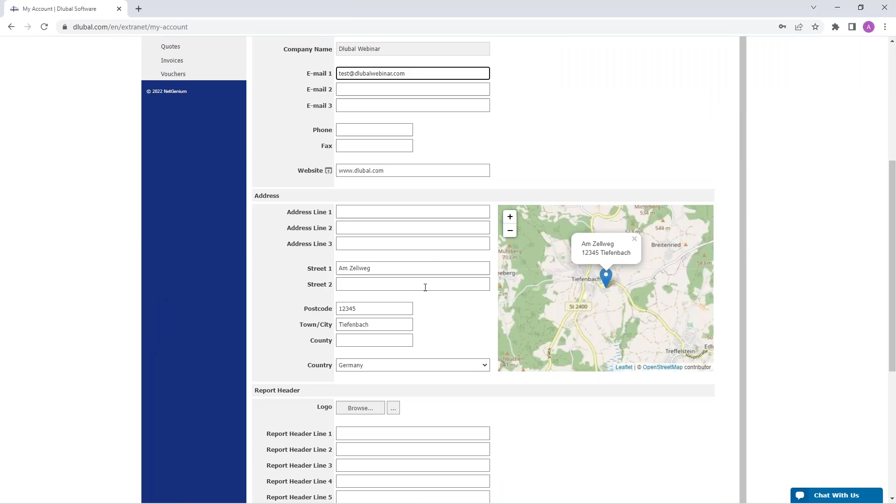Okay, then my activities. If you send questions to the Dlubal support with a certain subject, you can see who's the solver, if it is completed, and so on. Then the next table is the company, the data of your company, then the users of the company. And if you have got admin rights, you can add a new user and you can give the new user also admin rights. And then he can also create new users.

Okay, then you can see the service contracts of your company, all activities of the company, the questions, for example, to our support, and the status, then quotes, invoices, and vouchers. To the vouchers: before you purchase any product of us, take a look at the vouchers. Maybe there are vouchers from a campaign, or all our customers that send us customer projects get a voucher of 100 euro, and the voucher is available for 3 years. And if you want to buy any product, just take a look at the vouchers.

Then here you can see all licenses of your company. That test account has got 3 licenses. If you scroll down a little bit, you can see the first license has got all licenses of RFEM, all add-ons, and RSTAB 9. And for example, the third account has only licenses for RSTAB 9 with all add-ons. Okay, that's a good overview. Then another table with the licenses. Okay, and here you can see, for example, if licenses are borrowed for a certain time. Okay, that should be all I would like to explain for the licenses.

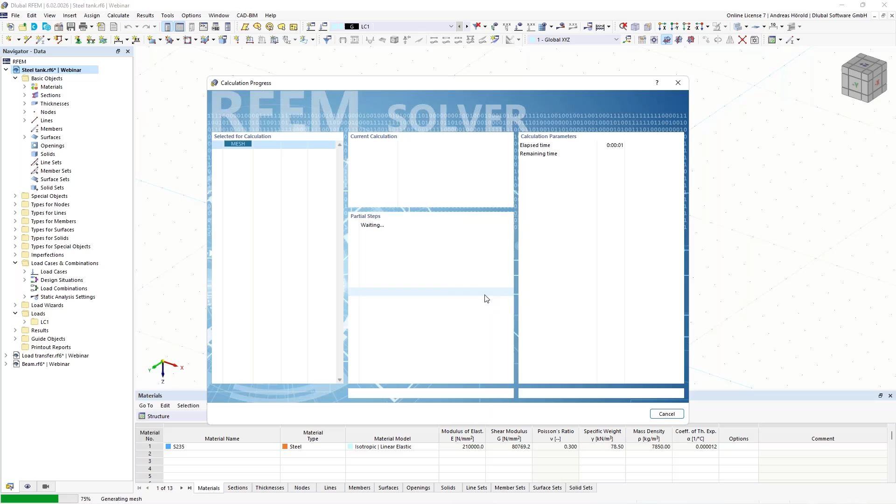I wanted to introduce the Dlubal extranet, and we turn to the next question and to the program. The next question is, why can't I mesh my model with curved surfaces? Okay, let's try it. We want to create a mesh, and we get this error message. It's currently not possible to mesh a quadrangle area on the 360-degree circle. We are working on a solution, and in the meantime, you need to use a workaround.

The surface must be divided into several quadrangle surfaces. I will show you how to do that. I delete the two surfaces. Then I copy these two lines during a rotation; I use the function rotate selected objects. I check create copy, one copy, 180 degrees. The axis should be set, that axis, and the rotation point should be the middle of the circle.

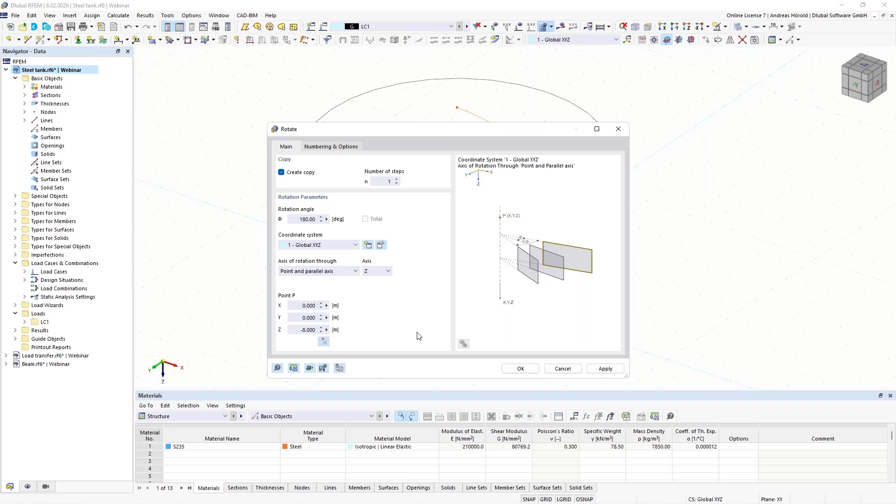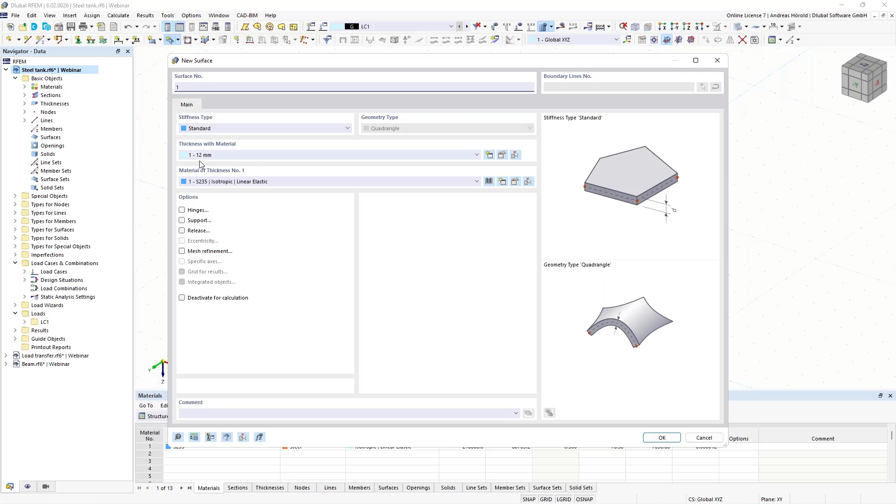Okay, then I use the function here right above, connect selected lines, and with that window I divide the circle into two lines, also the lower circle. Okay, now I can create the new surfaces. That should be quadrangle surfaces, with the same thickness as before, 12 millimeter. Okay, and I select the boundary lines. And I create 4 surfaces now.

Okay. Okay, and now we can create the mesh. Okay, that works. Now it's only a workaround during the correcting of that bug. Okay, then we turn to the next questions.

How can free nodes be deleted? From time to time during modeling or after an import, it can happen that free nodes are created, for example, when you import your model from a CAD program. These nodes can easily be found. At first, I create some free nodes. And I can find them with Edit, Select, and Free Nodes. There's also a shortcut, Control, Shift, and F key.

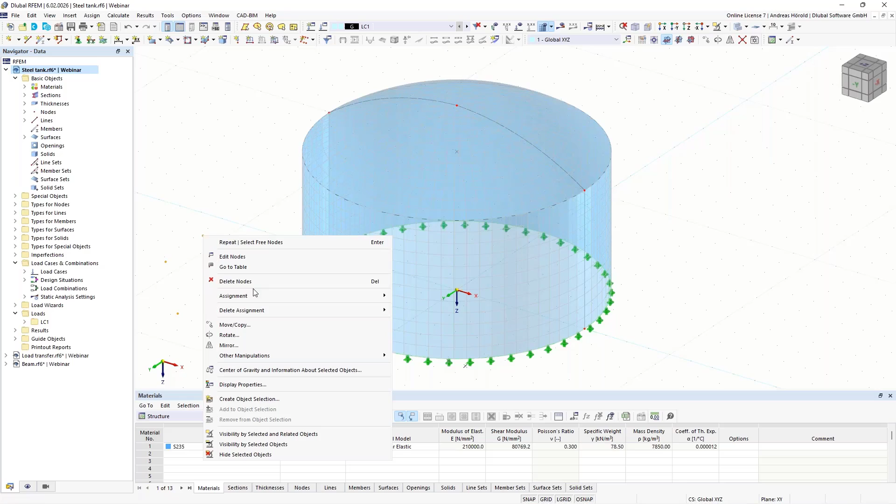I select them with the function. You can see now they are yellow. And you can delete them by pressing the delete key or with a right mouse click on one node, and you can choose delete nodes. Okay, that's the solution for that question. So then we turn to another model and another question.

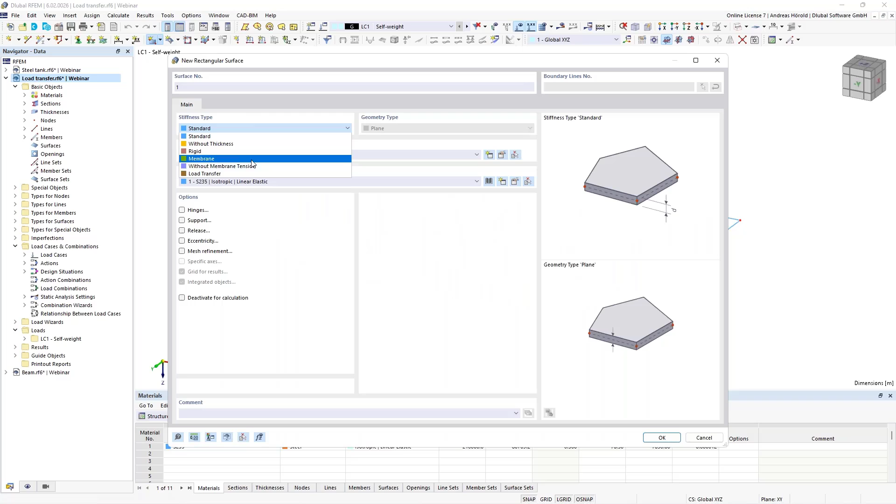The question is, how can an areal load transfer be generated by a distributed load on members? There are 2 possibilities. The first possibility is to use a surface of type load transfer, or the load wizard. I will show the two possibilities. So I start with a surface. Stiffness type is load transfer. That surface has no stiffness.

Okay, I select the nodes here on the edges. Okay. So now we have got four surfaces, and we create a surface load.

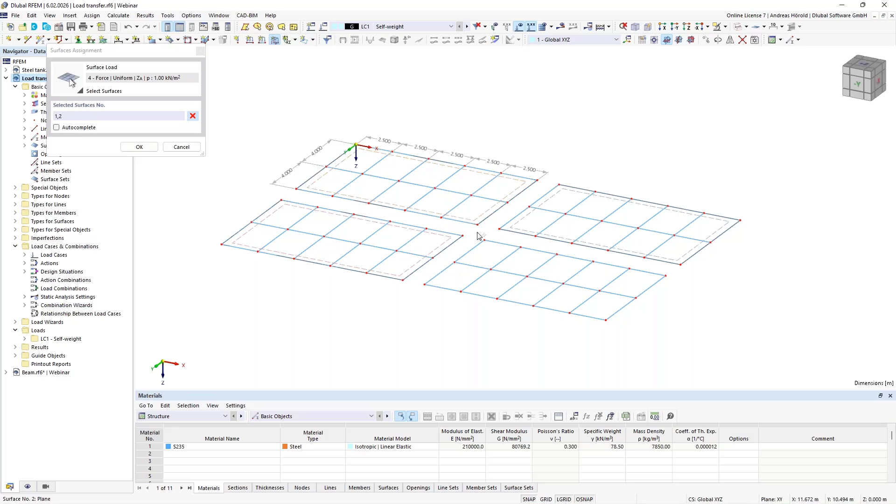I choose 1 kilonewton per square meter. 3 times. Okay. So I can divide this load, or divide the display, for example by clicking on the surface and selecting display load transfer separately. Only the display is then separated.

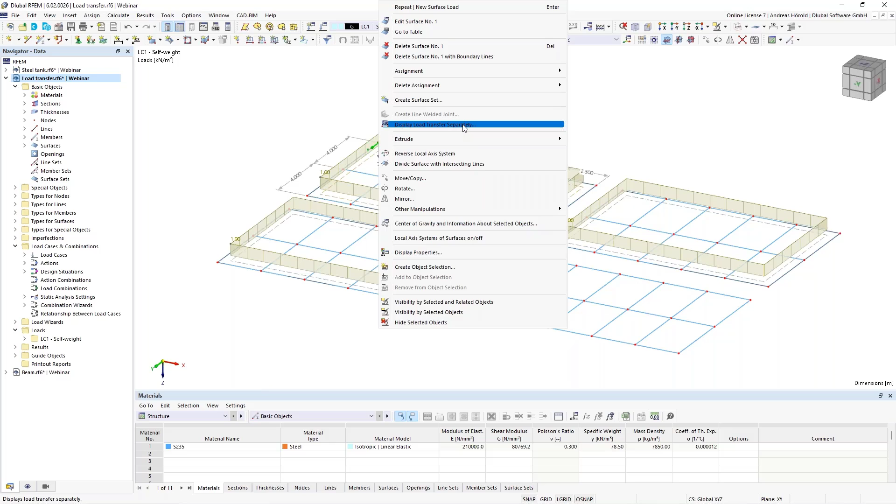So this is the first solution, and I can undo that and use the other solution. In the navigator display under surfaces, you can check display load transfer separately here. Okay. So let's change the load distribution.

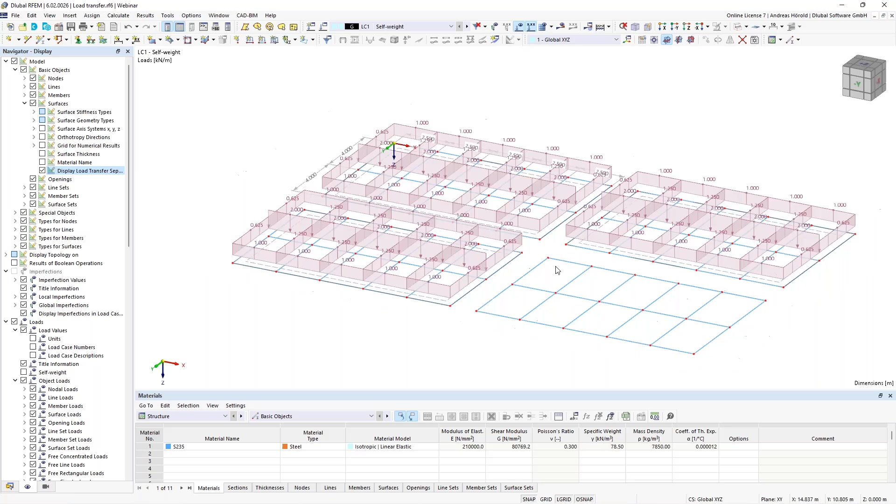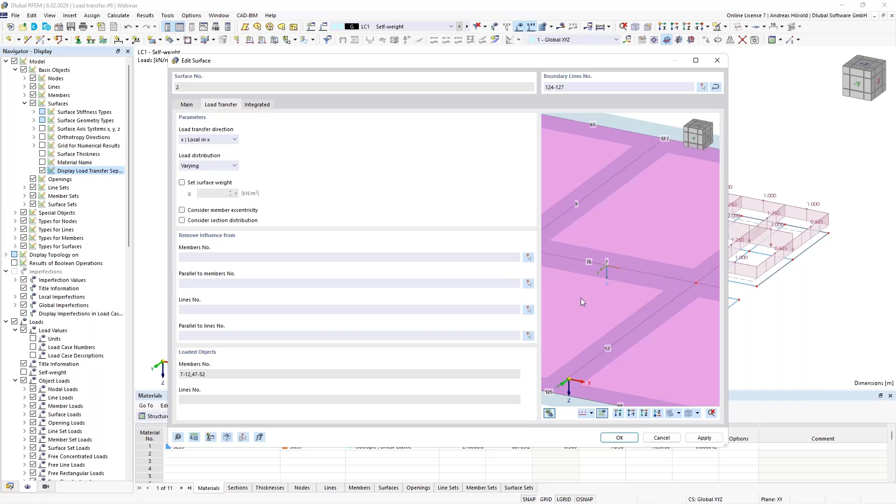I double click on that surface, go to load transfer, and can change the direction. At the moment it's both directions, and I select for this example local in X. If you click on that button here, you can see where the X direction is. That's the local X direction of the surface, and that's the Y direction. Okay.

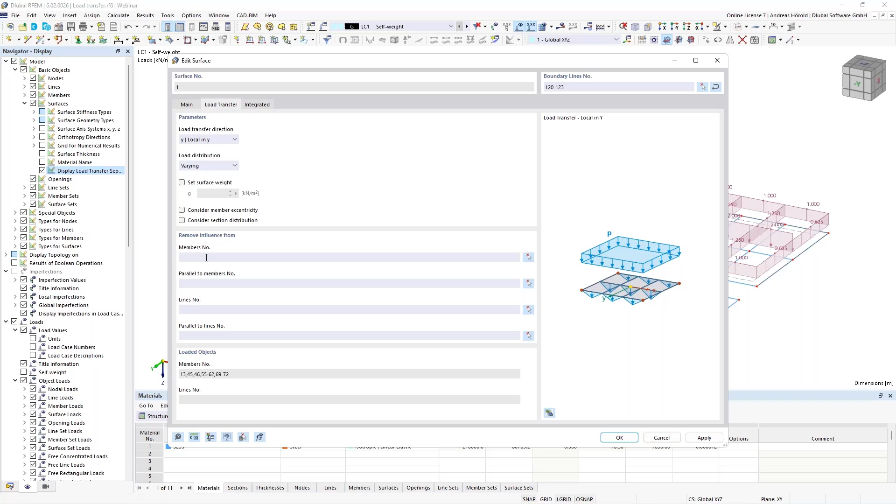Okay, I can use the Y direction here. Double click, then Y direction. Now before I leave the dialog, you can select that button here and assign a load for the surface weight. Or you can remove members from the loading with, for example, that function here.

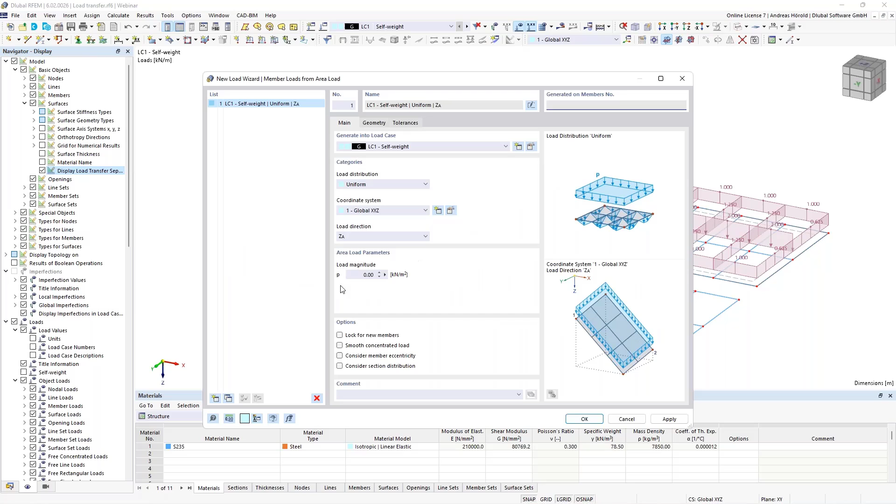Okay, here we have got two directions. At the moment, it's not yet possible to assign a varying load, but you can do that with the load wizard. I will do that with insert load wizards, member loads from area load. So a load as well of 1 kilonewton per square meter.

Then I have to select the geometry, the 4 edges. Okay, and I can remove members from the loading. All members that are parallel to that member shouldn't get any load. Okay, and that's the same as for this surface.

Okay, we can change that. I would like to transfer the load in both directions. And now you can see where the varying loads are. Those are the possibilities to assign loads or surface loads on members. Then we turn to the next question.

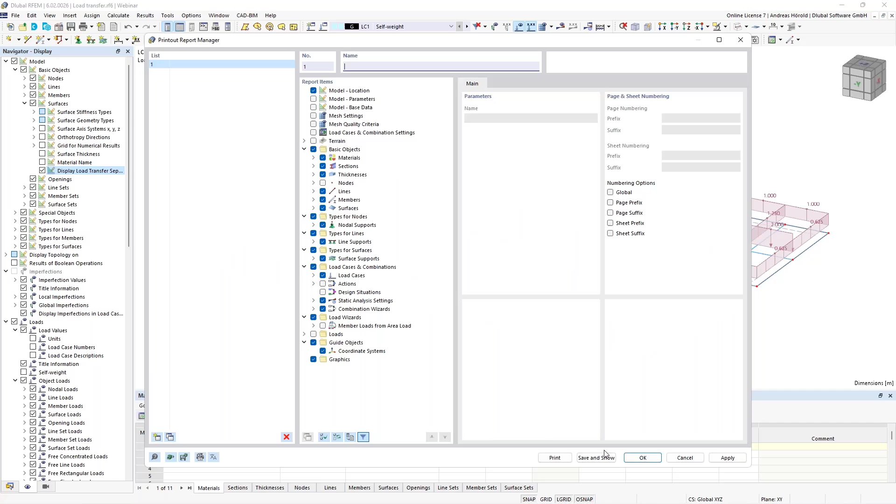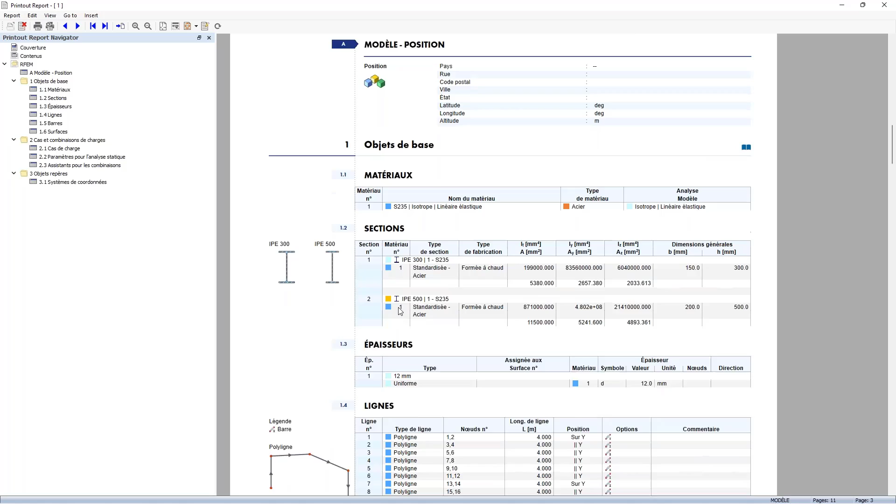How can I change the language in the printout report? I create a small printout report. Under edit, you can find the languages, and there are 11 languages. That means you can translate your printout report into 10 different languages, for example into French, and it takes only some seconds to translate the whole printout report. Now all is in French.

So I use again the English language. At the moment, it's not yet possible to create an own language or to add technical terms in a table. But we are working on that, and we will implement that in future.

The next question is, how can I move a PDF file to any position in the printout report? You can insert different things, for example images, plain text, HTML files, formulas, and also a PDF. I insert a PDF, only one page. If you've got more pages in the PDF, you can select only, for example, page 1 and 2 and so on. In my case, it's not necessary because I've got only one page.

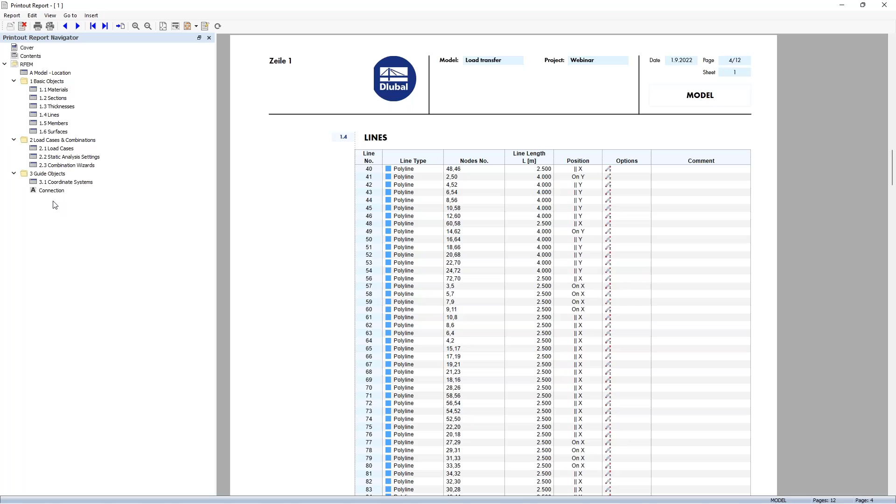Then you can define left and right margins and so on. Okay, I must use all pages because I've got only one page. By default, this is always added to the end of the printout report, and it can be moved via drag and drop. For example, drag and drop.

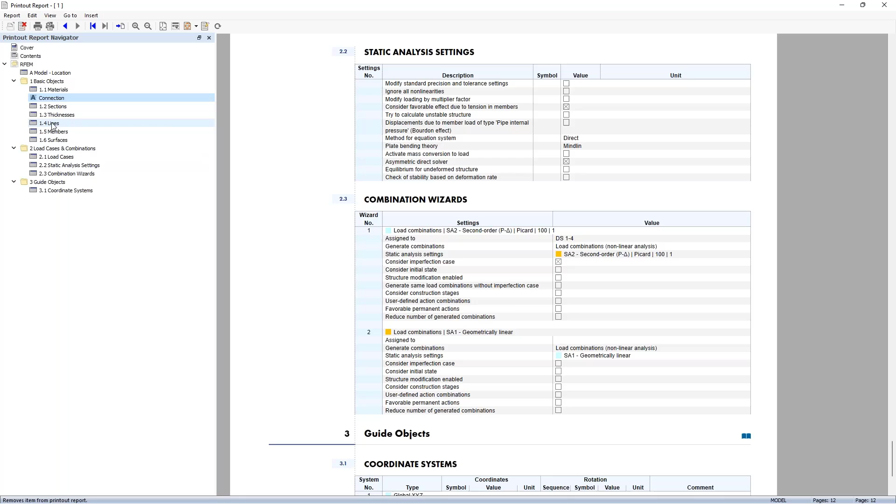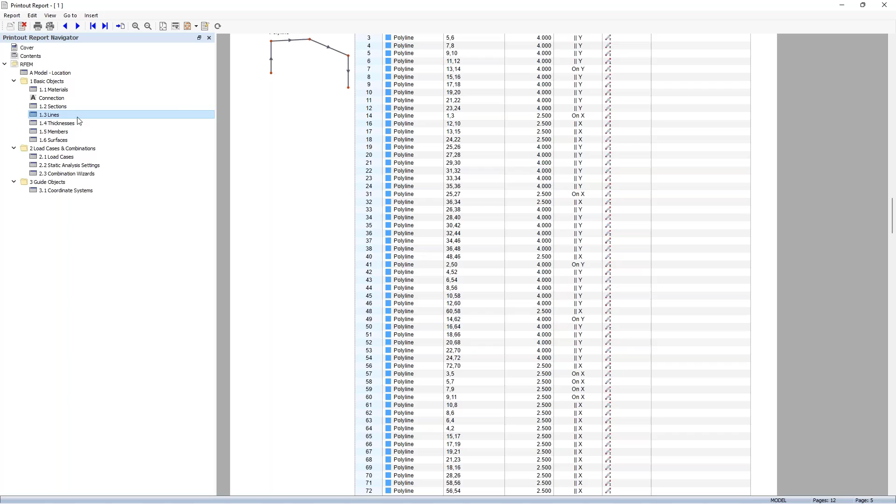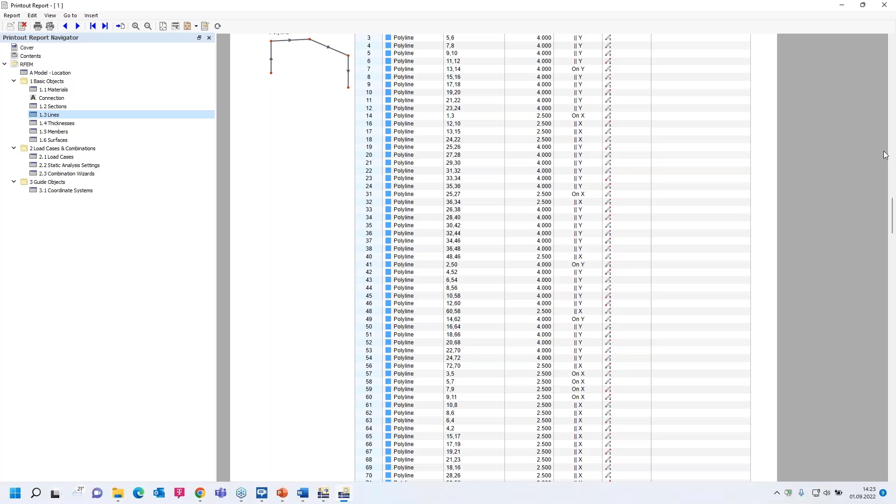Also with the right mouse click, you can move the item to the top, the paragraph, then move item down and so on. You can also move chapters by right click or drag and drop, and it will be renumbered. The same is valid for images, text blocks, and so on. You can see it's quite easy to handle. Okay, then I close the printout report.

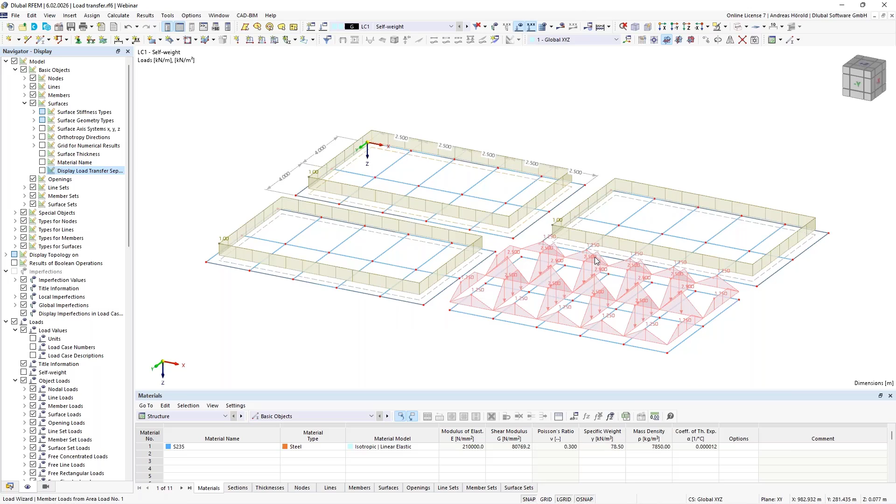We turn back to RFEM, and the next question: how can I increase or decrease the loads uniformly in the load case? I let the loads display not separately, so that you can see the effect. Now we've got the surface load of 1 kilonewton per square meter. You can use that button above, edit active load case, or search the load case in the navigator data and double click on it.

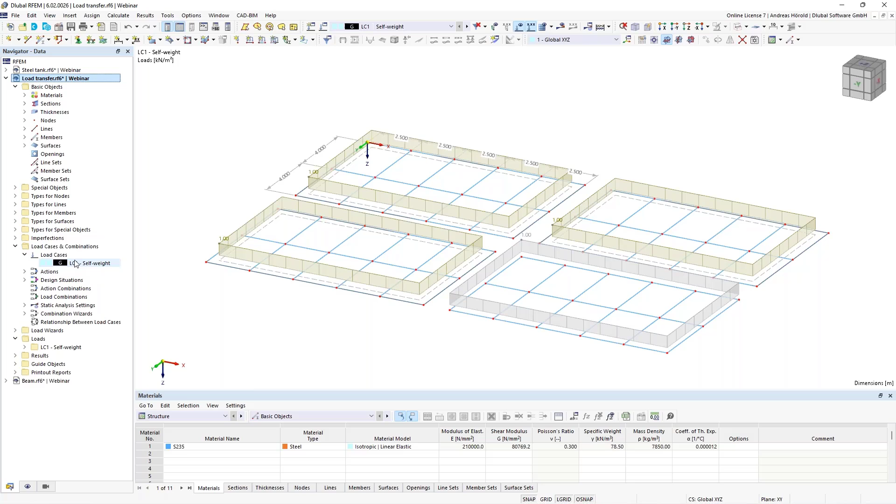And there are different static analysis settings available. By default, a load case has got the geometrically linear analysis setting. And for example, if you have got more than one load case and you would like to increase the load only for that load case, I recommend to copy that static analysis setting. How to do that? I use the right button here.

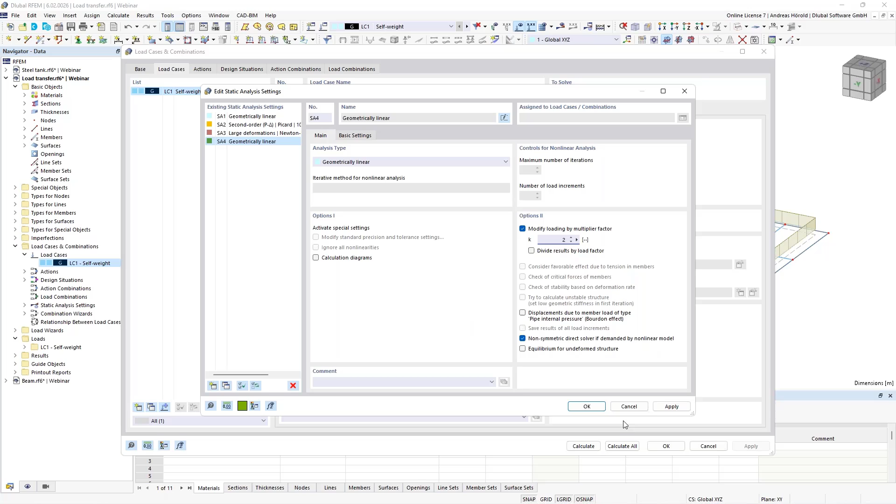So, and then I can copy that static analysis setting, and then here on the right side under Options 2, I can modify the loading by multiplier factor. For example, I can use 2. You can also divide by load factor. Okay, and I leave the dialog and choose for the self-weight load case the 4th static analysis setting.

So, and then I can leave the dialog, and you can see 2 kilonewtons per square meter has got the self-weight load case. Also that load for the self-weight load case. Yeah, and it's the same workflow for decreasing the load of one load case.

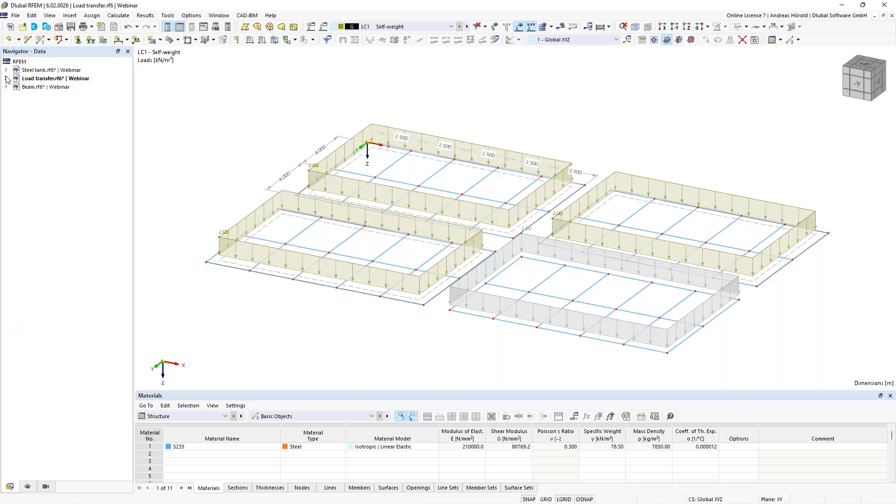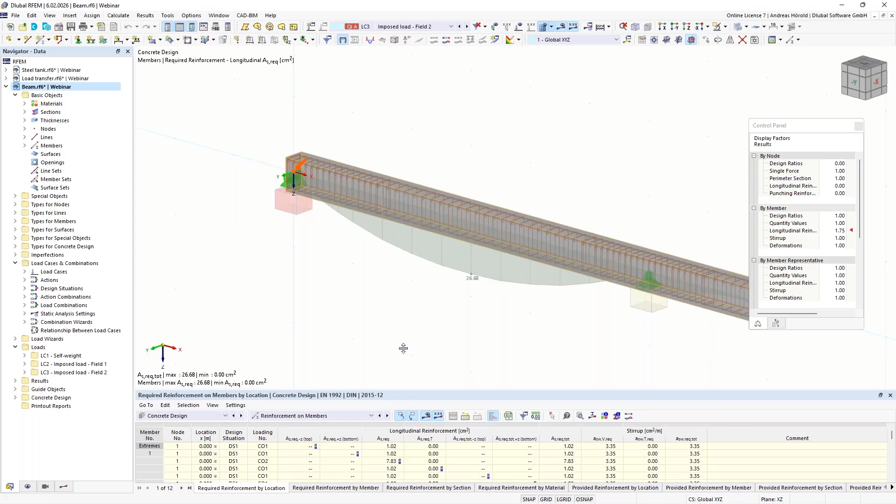Okay, then we turn to the next model and the last question. Why is reinforcement uniformly distributed around the circumference? When we display the concrete design and the reinforcement on members, you can see at the moment there's no required longitudinal reinforcement at the top and on the bottom. So how can we solve that?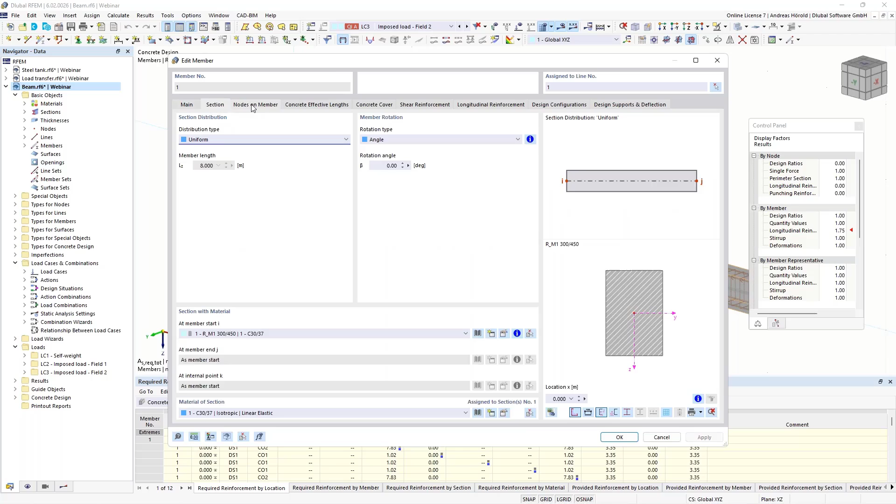You can double click on the member. Where are the settings for the member? I can shortly click through every dialog, main and the section, nodes on member, the effective length. If you have got effective lengths, you can take a look on the settings. For this member with bending, there are no effective lengths defined.

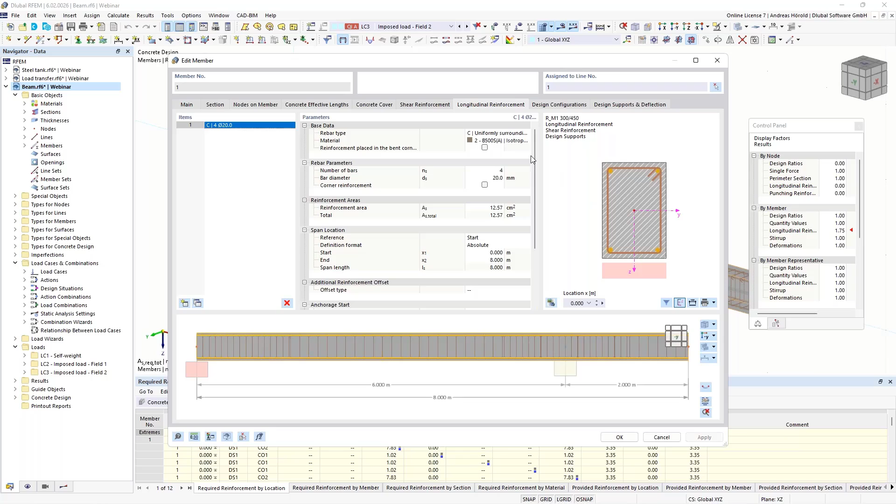Then the concrete cover, shear reinforcement, and the settings for the longitudinal reinforcement. And you can see the rebar type here, uniformly surrounding. 4 bars, in every edge 1 bar, and I will change that to unsymmetrical. 2 rebars at the top and 5 on the bottom, and 1 on the left side and on the right side.

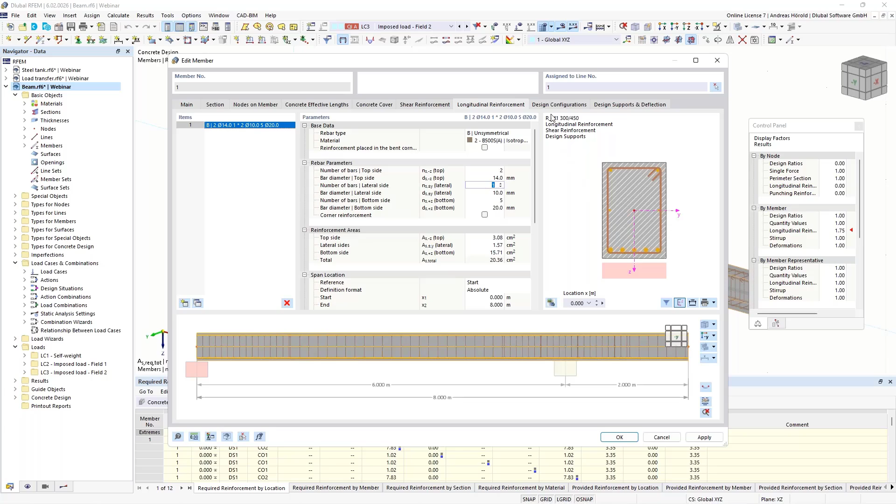So then design configurations, we will take a look and use the edit button. And you can see also here's a wrong setting. The reinforcement layout for the required reinforcement is uniformly surrounding, and I will change that to the top and bottom symmetrical distribution.

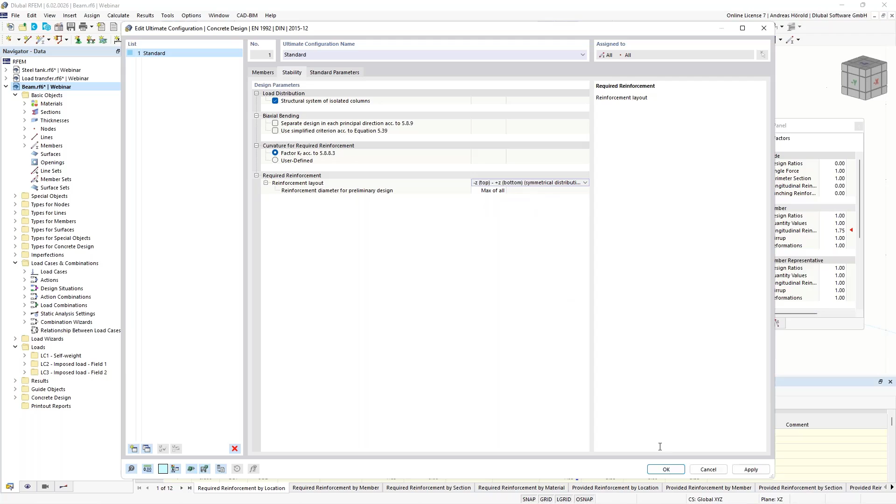Okay, then we can take a look at the stability. Also here is selected uniformly surrounding, and I use the same distribution, the symmetrical distribution. Okay, then we can apply that and calculate all again. Now just take a look at the parallel calculation. Our solver uses all cores of your computer.

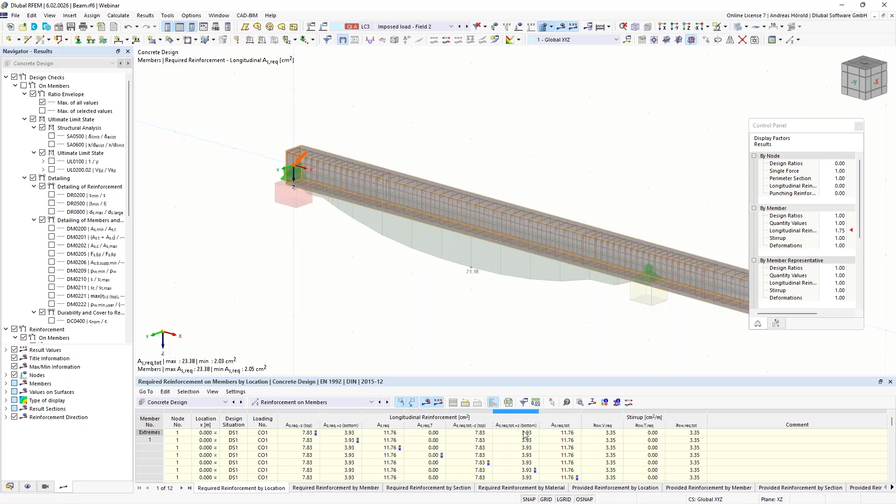So then reinforcement on members, and now you can see the required reinforcement on the top and at the bottom. Okay, that should be all to the 8 questions.